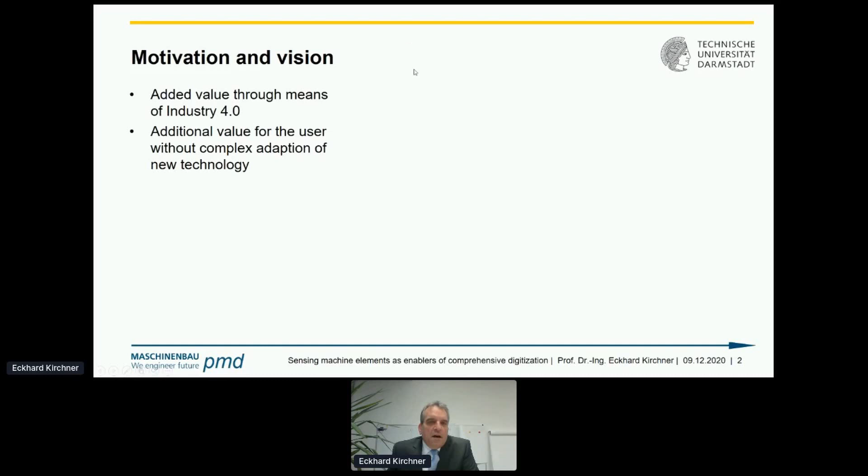We all know that there's a lot of discussion about added value through Industry 4.0. What does that mean? Additional value is made available by gathering new information, preferably without adapting complex new technology, rather by exploiting the sensors and signals that are available in the machines. This enables the usability of cyber-physical systems, CPS, and predictions, for instance, about required maintenance based on big data.

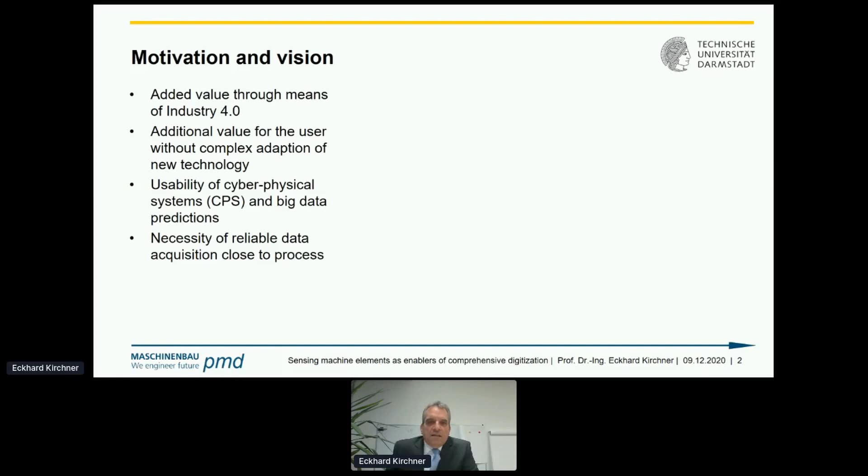The necessity of reliable data acquisition close to the process is obvious. We want to measure not as much as we can, but as good as we can. The idea now is that we use our machine elements, basically the atoms of our mechanical design, here a rolling bearing, integrate those into a system, here a simple single stage transmission, and use them as a sensor.

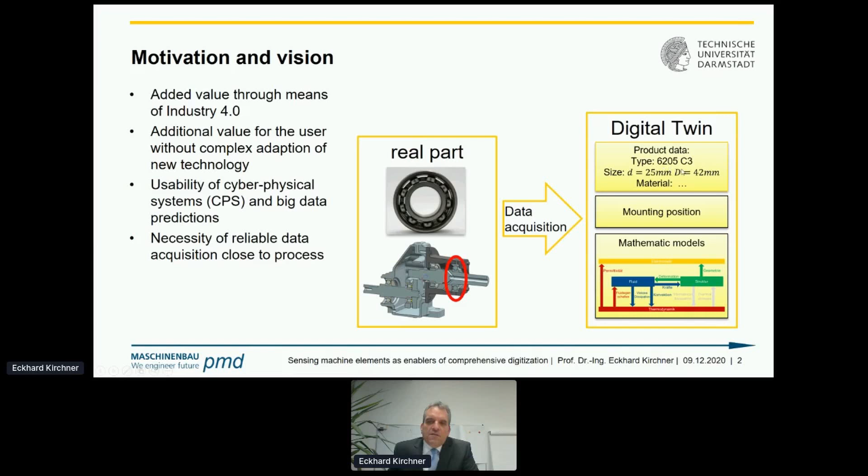The data which is acquired can be fed into the digital twin. For instance, here, the digital twin of that rolling bearing, special type, 6205 C3, dimensions, material, we have the mounting position, and we can apply or connect also a mathematics model. Here, the model is for calculating the lubrication film in the rolling bearing and its interaction with an electric field. The real part and the digital twin together make up the CPS, the cyber-physical system of that rolling bearing.

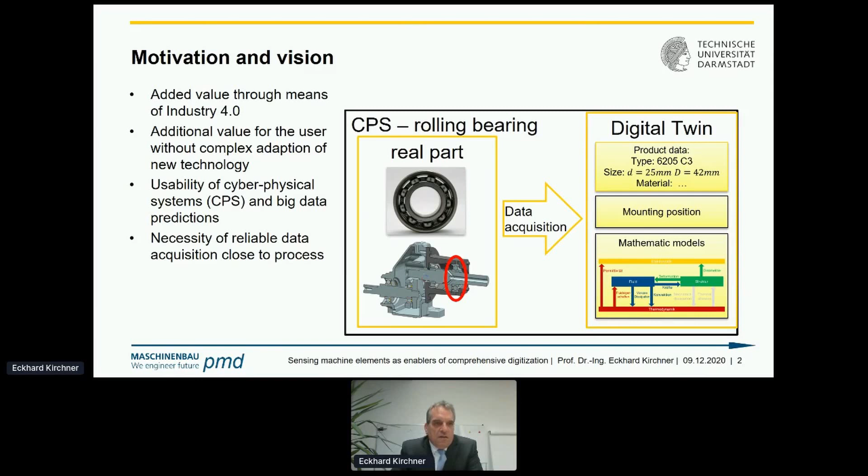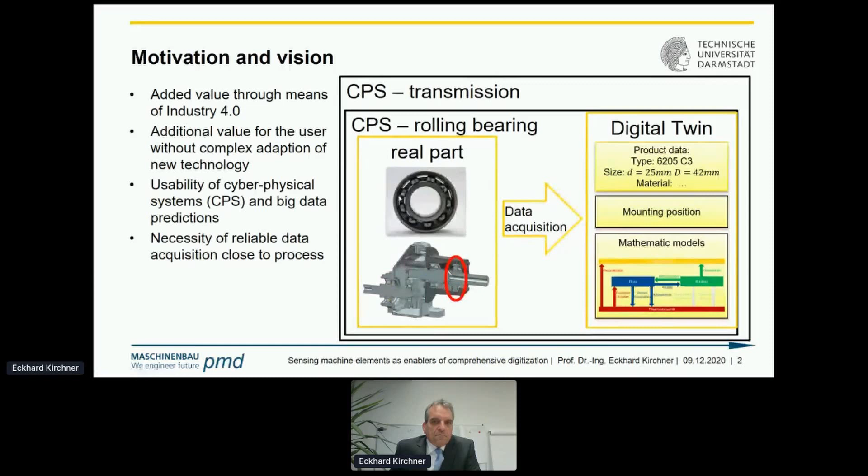And to be honest, nobody really cares about how a bearing feels. The real quantity of interest is the transmission or the system in which the rolling bearing is applied. That's the motivation, that's the vision. We want to measure in the machine element and provide this information to system level control in a reasonable way.

Structure of the following, around about 18 minutes. After that discussion, I will briefly touch base on digital twin, prototype and shadow, and then talk about data value and veracity. What do we mean? Measurement locations are important to understand what options we have for applying our measurement system. Then we will go into the classification of machine elements. This leads us then to the benefits and challenges of next generation machine elements, which have an additional functionality in the field of sensing technology. I will conclude with an outlook to the remaining obstacles to bring those ideas into production.

The digital twin, we start with a digital master. This is our CAD model of our plant, of our machine, of our rolling bearing. From that, during the production, we can derive a digital prototype. This is still our CAD model. We have the digital shadow, which is representing a specific product, whether it's a rolling bearing, a transmission, or a plant. It's the same, but it's different levels of complexity, however. Now, out of the same digital master, we can derive digital twins for various instances of, for instance, the same production part number, simply different digital twins of different products.

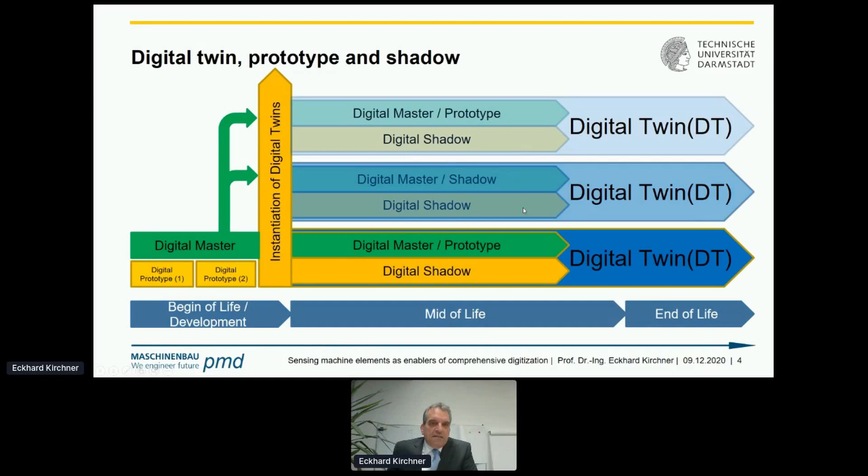When it comes to the data itself, we have this model here, the 5V model. It was presented by IBM in the beginning, and it's a model to quantify the important aspects, important characteristics, especially for big data volumes. Data volume is obvious. That's simply the amount of bytes, bits, megabytes we need to store. Velocity, that's in our case related to the frequency, for instance. We measure temperature and acceleration with different frequencies, and that needs to be taken into consideration. The variety, for our purposes, it's the sensor perspective. Is it a temperature which we record, or a picture?

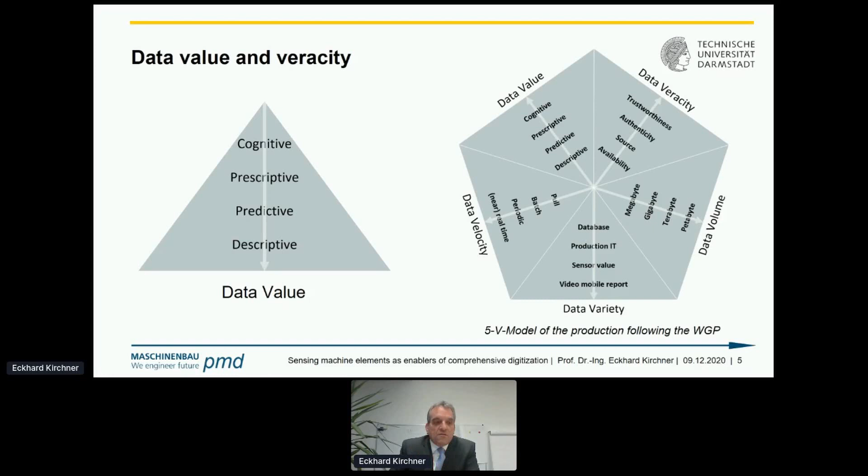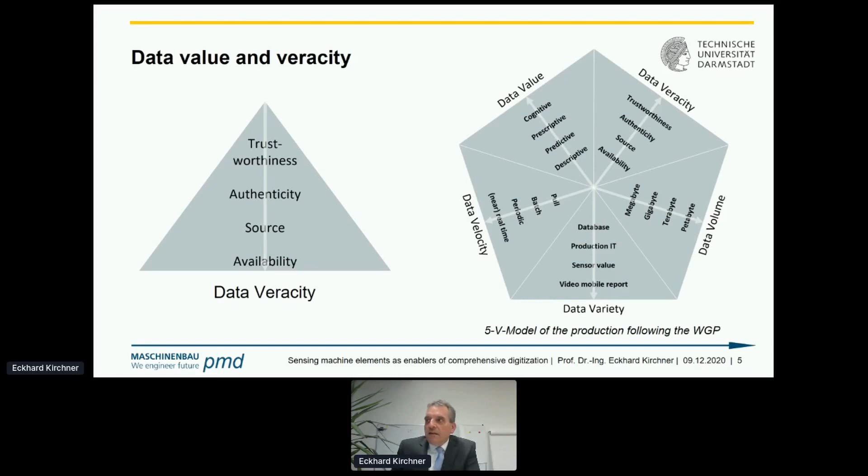Important is the data value. Is this really data, or can we get information from that data? That means we have managed the first level of extraction of information, reduced the data to information, or can we already gain knowledge from the measured data? Data veracity simply means, can we trust the data? Is it reliable? Is it repeatable? Etc. With that in mind, we now look to the different measuring locations.

I've chosen an example from my industrial career. Jörg mentioned that I was responsible for the transmission development here in Valeo Siemens before I joined academia. We have a single gear stage. We have an electric motor, an inverter, a non-switchable two-shaft transmission, and a little differential. Now the task is that we want to measure the output torque, which is relevant for the vehicle dynamics control. Different measurement positions are possible.

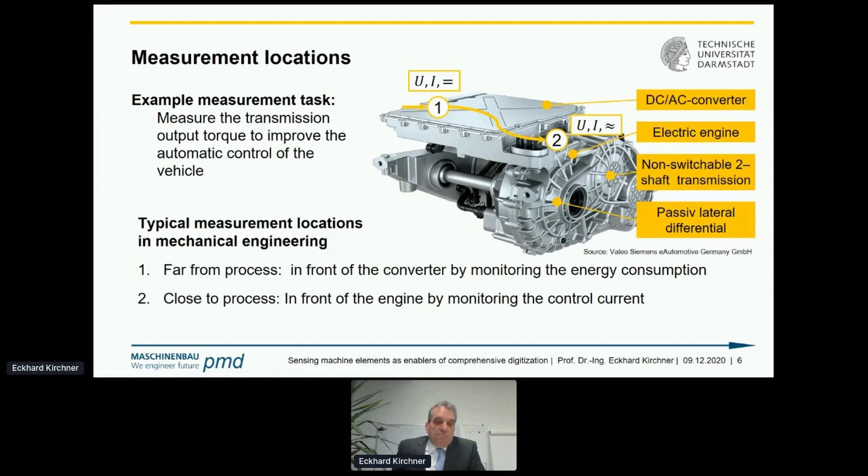We can start, for instance, to measure the current, the power supplied from the battery to the inverter. Here we measure voltage and current in the direct current region. Take that as number 1. Following the power path, the next position is at the outlet of the inverter, at the inlet of the stator. Here we have, again, voltage and current, but now in the alternating current regime. We have gone through a cycle of energy transformation, from direct to alternating current. Now we are close to process. Here we are far from process.

Again, when we follow the power path, we end up here in our side shaft. Here we are now in the in situ position. That's really the quantity of interest. We want to measure the torque at the wheels or at the axle in order to be able to perform high quality control of our drive system. We're directly measuring in the power transfer path.

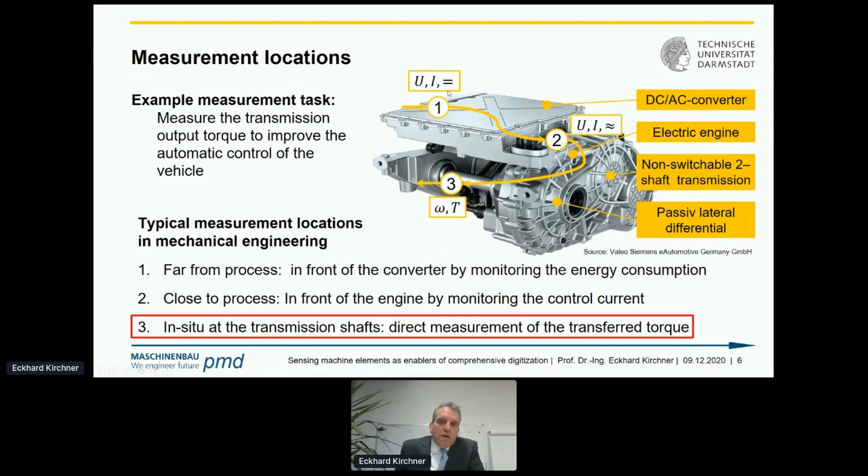Now the target, the quantity of interest, speed and torque. So that's our target. We want to measure in situ, really in the working process, and not at a close or a far away position. That's the target for our measuring location.

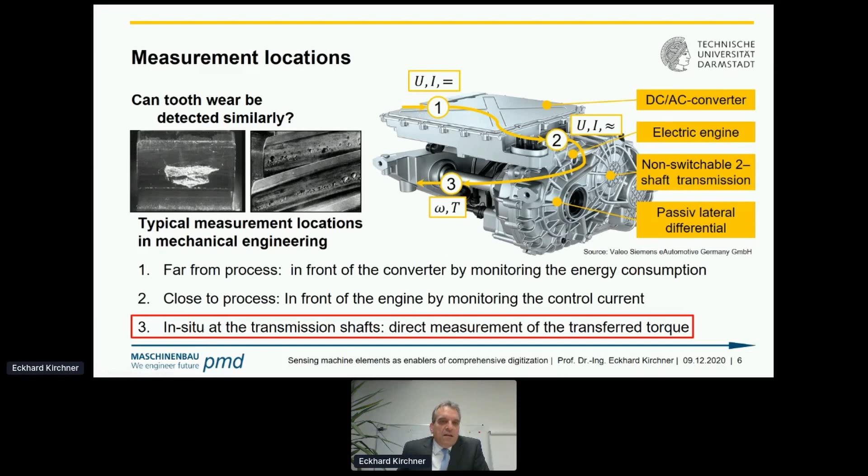And now the question arises. Imagine we have tooth wear. Can we also detect tooth wear by a similar measuring philosophy? That's the challenge. Now we look to that tooth wear. We start to analyze how we can really detect the patterns in our system.

We have the first measuring location, as it is usually done, somewhere ex situ, off process. We have the target quantity, our vibration of the torque, which is caused by the pitting here, for instance. And we have our measuring chain. Here we have the received signal, which can be used to derive from that data information and knowledge. With the in situ measurement, the measuring chain looks very much the same.

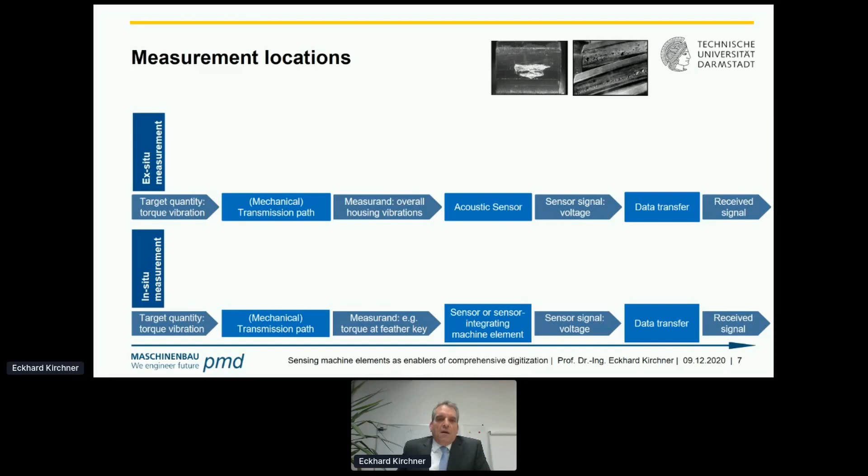But now the point is all about disturbances. At the ex situ position, we have a lot of different disturbances which can have an influence on the data received by our control system. We have to understand all those different mechanisms of the disturbances and their effect on the measuring chain. For instance, here the mechanical path of the transmission.

We have production tolerances. We have the effect of a transmission lubricant. We have splash, we have drag. In the electric circuit, we have losses in the copper, conversion losses, etc., which we need to take into account.

If we now apply our in situ measurement, we all of a sudden see that we have here our sensor, and we have eliminated quite a bunch of uncertainty and their effect on the measuring result. However, we still need to understand the remaining disturbances and their impact on our signal, and that's part of our research.

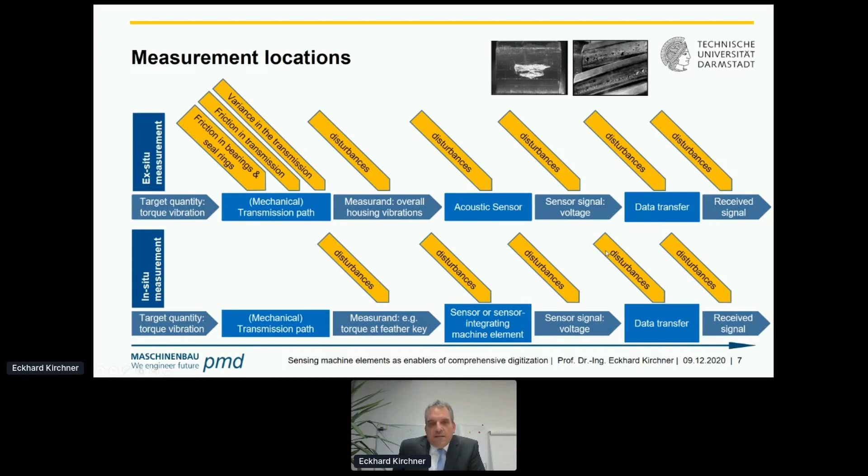With that in mind, we now look to the machine elements. Machine elements, you probably think, why do we need to classify those? There are shelves of textbooks available which describe all those machine elements. Yes, that's true. We have our conventional machine elements. That's the shelf of bookstores. But mechatronic machine elements, that's the novel aspect.

Now we bring the machine element into a control circuit, and we make this machine element all of a sudden talk to our controller, to sensors, providing data, being part of the communication cycle. We can differentiate the mechatronic machine elements into actoric machine elements and sensing machine elements. We will focus here on the sensing machine elements for a very simple reason.

If we look to the obstacles at the end, we see that energy and data supply and transfer is the most challenging question. For a sensor, we have a few milliwatt power supply. For an actuator, we have completely different orders of magnitude of energy which need to be provided. And that makes the story here much more difficult. So we start with the sensing machine elements as a discussion base.

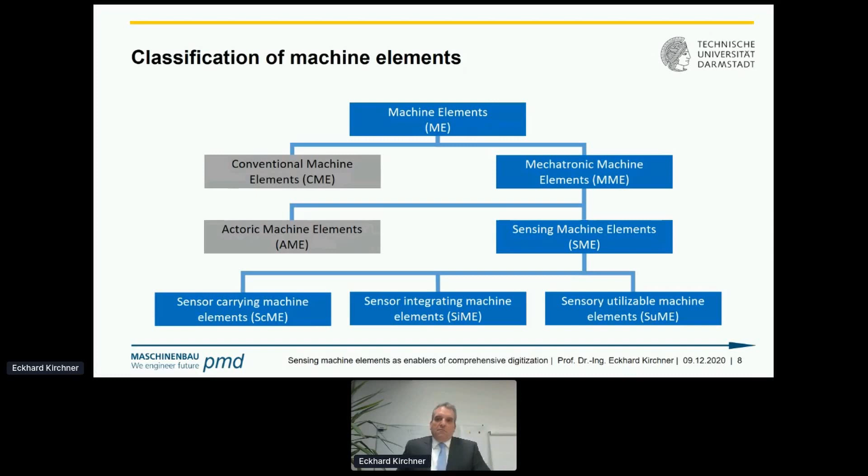Now we can differentiate those further. We have sensor carrying machine elements, and I will give an example on the next slide. We have sensor integrating machine elements, and this is what we are trying to push forward with our research together with other universities in Germany. And we have sensory utilizable machine elements. Here we have an effect which can be used as a sensor itself. Let's look to the examples which make it more clear.

The sensor carrying machine element: here we have the mechanical function of the machine element, and the sensor, annotated by that yellow box here, has no real connection to that machine element. We have simply a machine element carrying a sensor, that's what the classification says.

The sensor integrating machine element: we have now a connection between our mechanical function. Here's a mechanical path to that sensor. All of a sudden the sensor signal is affected by the mechanical function. For the sensory utilizable machine element, we have the mechanical function and the sensorial effect being closely tied together. We cannot distinguish between the sensory effect and, for instance, the tribological layer.

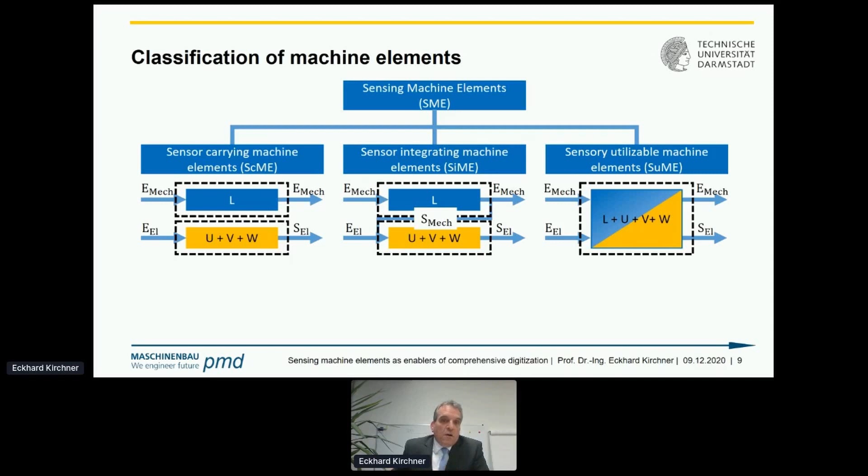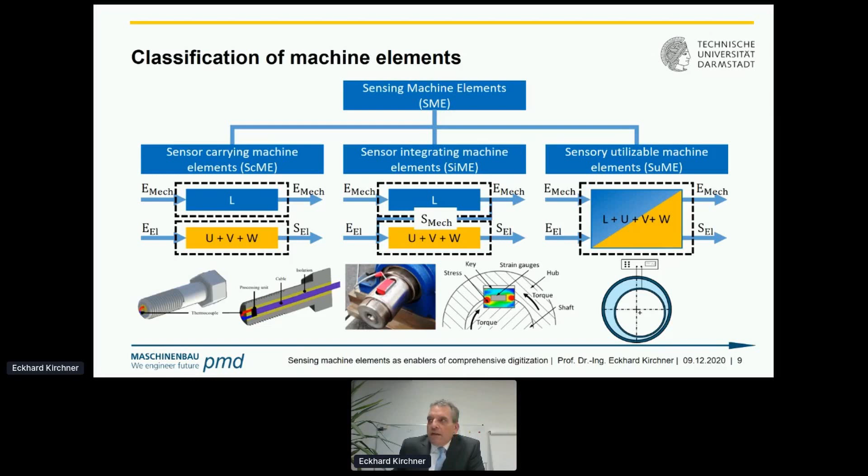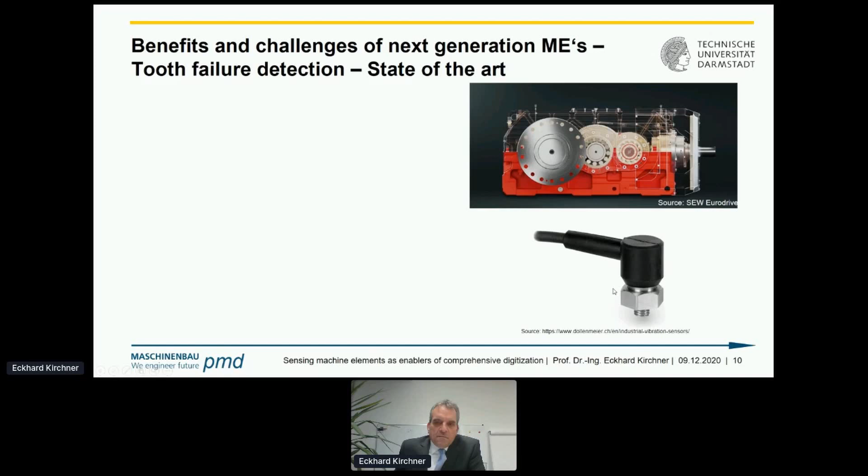With that in mind, we start to look to an example. Here, for instance, a picture from SEW-Eurodrive. The idea is to monitor that gearbox. Typically, we apply an accelerometer somewhere to the housing of the transmission. In order to simplify the following pictures, we have chosen here one of our demonstrator transmissions, which is much less complex, but still shows all the effects.

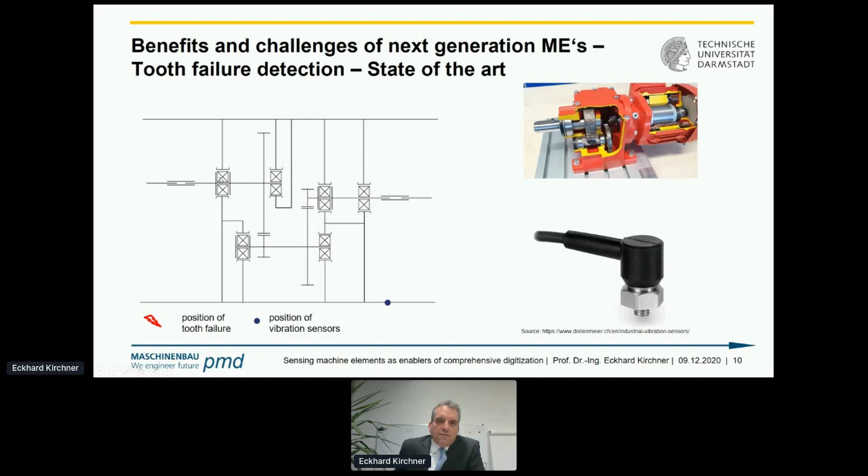We have our mechanical path. We have here a two-step gearbox, input shaft, output shaft, intermediate shaft. Here we have our tooth failure, and that tooth failure, we assume, is now communicated to our accelerometer on the housing via two different transfer paths. The first is via the intermediate shaft and its bearings, and the second path is via the output shaft and its bearings. So we have a non-unique transfer path from that damage pattern here to our accelerometer.

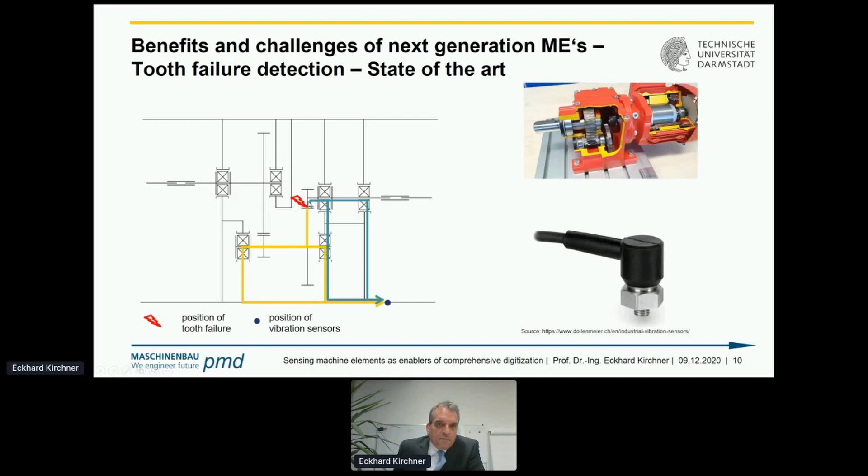If we now apply our sensor integrating machine elements, we still have the same structure. We have our input shaft, and now that input shaft comes with its own CPS, with its own cyber-physical system. We have a sensor integrating shaft coupling, for instance, and a sensor integrating feather key. The same for the intermediate shaft. We have two of those feather keys. The output shaft, again, a feather key and a shaft coupling.

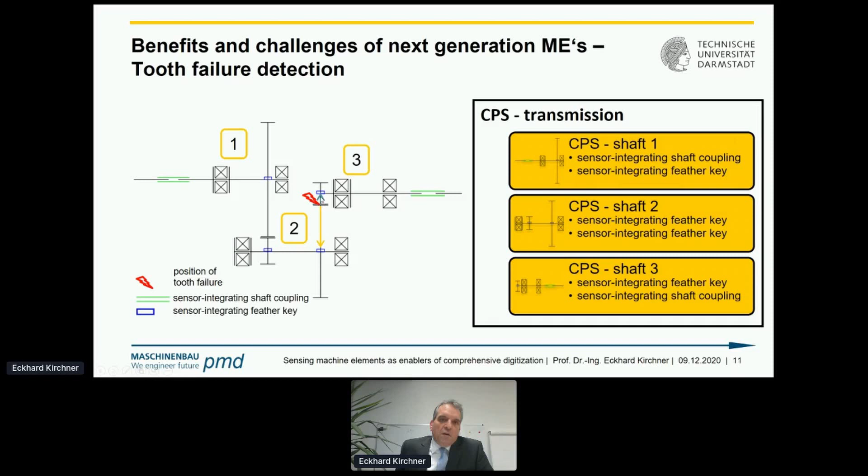And now we can read from our tooth failure here directly, for instance, via that feather key or the other on the output shaft. We have much more direct possibilities to read the signal of our sensors and to interpret those.

Looking to the challenges in the sensor, a quick comparison. I have to look onto the timing.

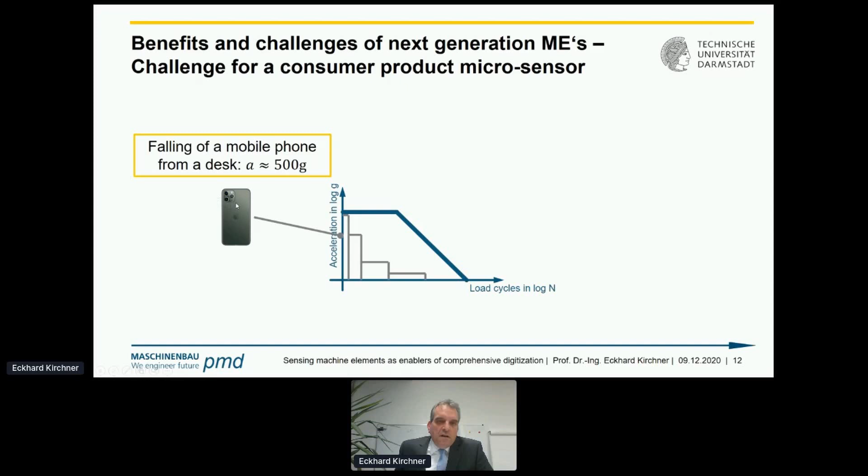We have here a smartphone. Many of you know the problem when the smartphone falls down, the sensors get wrecked. Now we have here a typical falling experiment, 500 G. If we apply the same sensor technology from the consumer product to, for instance, a belt drive system, we have now 500 G at every disk in our belt drive system.

Now, all of a sudden, we see that the load profile gets much worse for the application of one and the same sensor, which is working in the smartphone, when we implement them into a machine element. Here in that case, we have calculated up to 5,000 G acceleration load on the sensor.

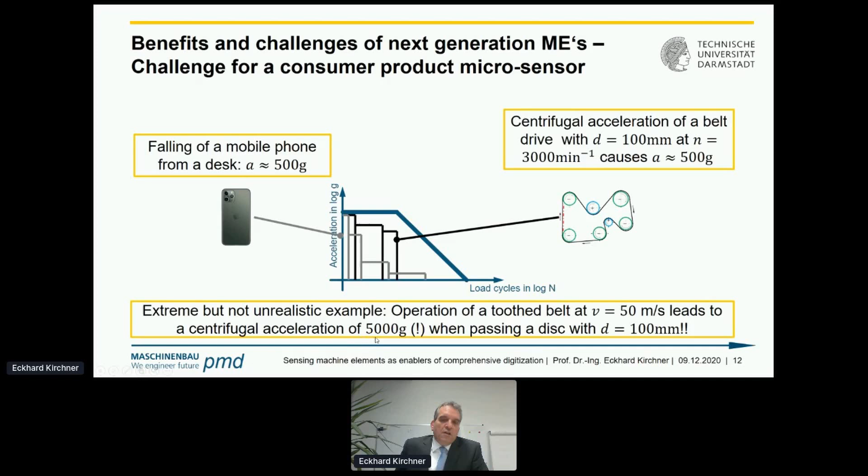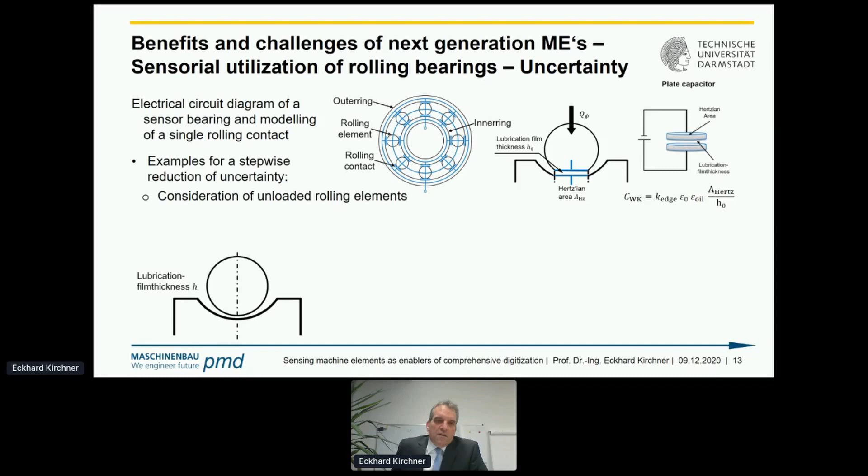Looking to the rolling bearing, we have here the example. We see that the outer ring, the inner ring, and the rollers form a complex network of capacitors. The model is that we interpret the Hertzian contact area as a capacitor, and from that we now have to reduce the complexity, the uncertainty. We have to, for instance, include the lubrication film thickness at unloaded rollers to improve the model quality. We have to include the complex geometry of the Hertzian contact.

And if we take a lot of data and feed them through a neural network, we end up all of a sudden with a pretty accurate way to interpret the measured capacity as a load sensor.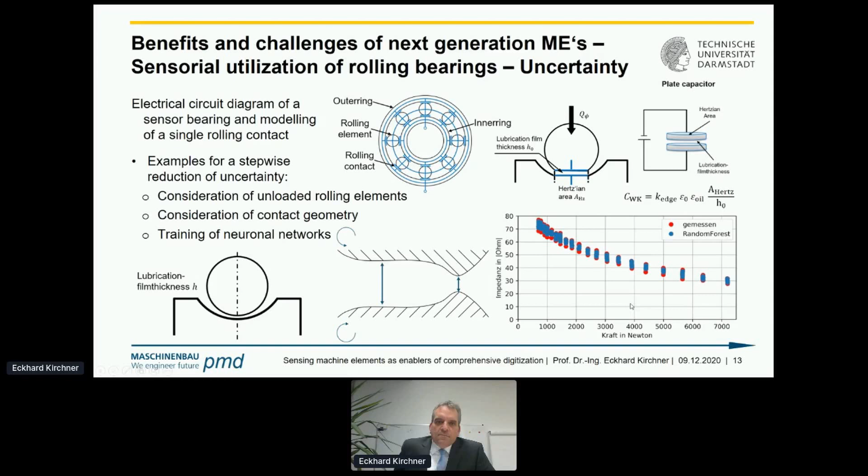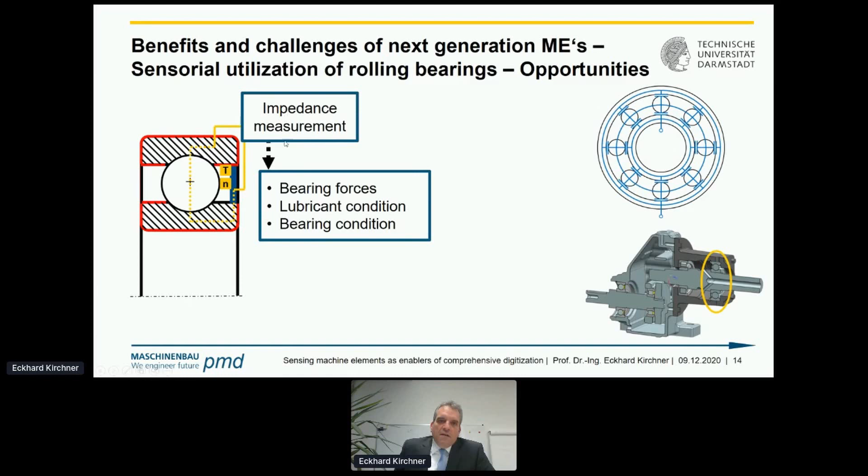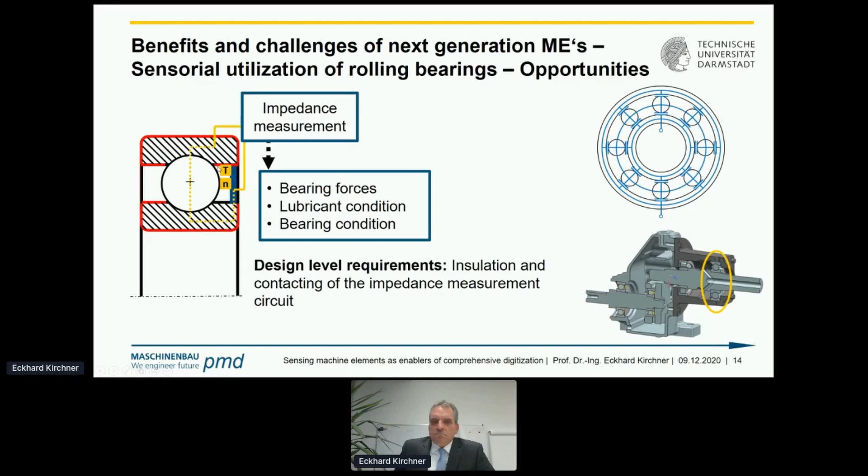If we apply that system into our single stage transmission, here we have our bearing, our sensor. We measure the impedance, and we can read from that bearing forces, lubricant condition, and bearing condition. The design requirement is that we have a proper insulation of our rolling bearing, and with that we can start to read now in the transmission.

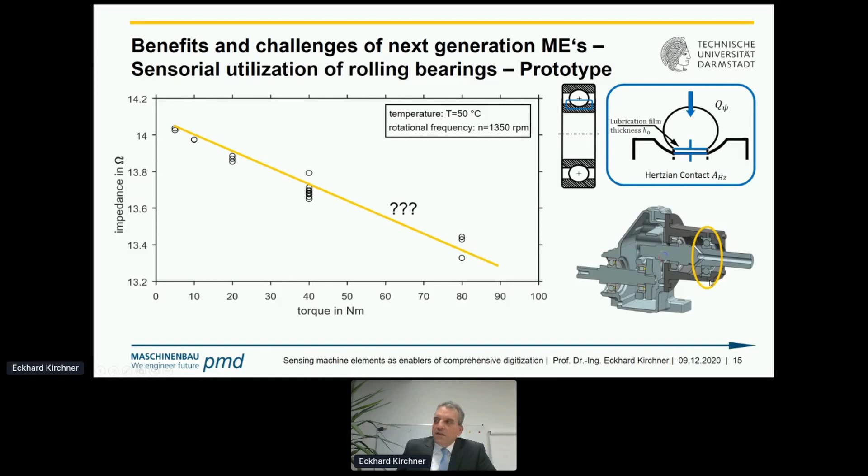And here we have a plot of different measured impedances versus torque level. It's not really a linear relationship, it's more complex, but still we are able now to derive a model and to interpret the capacity measured as a load sensor.

Conclusions. Sensing machine elements are still far away from production, but they allow us to measure in new possibilities, new locations, and they provide valuable information for the CPS of different levels in our system.

I have to shorten a little bit to keep the time.

However, there are disadvantages. The technology readiness levels are still low for most of those concepts. We have, for instance, to cope with the data and energy supply and transmission out of rotating systems or even electrically encapsulated systems. How do we get energy in and data out?